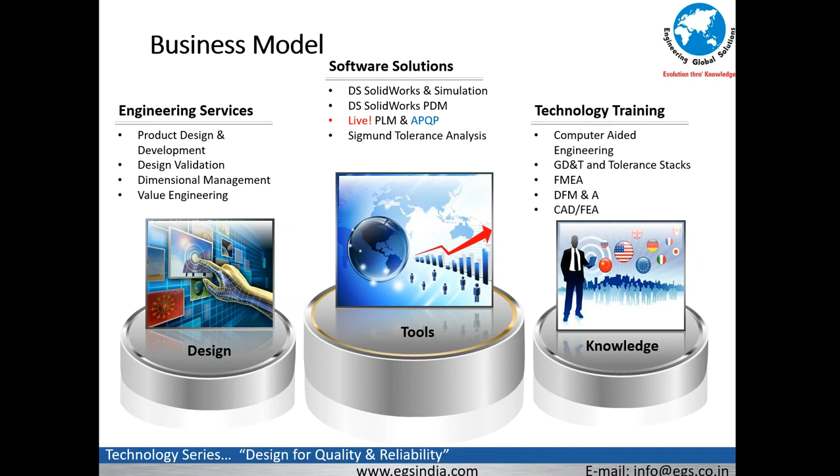In technical training, we provide computer-aided engineering training in finite element analysis, vibrations, and many different topics, geometric dimensioning and tolerancing and tolerance stacks, failure modes and effects analysis, design for manufacture and assembly, and CAD and FEA popular tools.

Now, any product development company starts with product development challenges that every day they face day in and day out. Assembly issues is paramount to most of the companies - 90 to 95% of the problems faced by the customer as well as the end customer and the service people are assembly related issues.

Second comes the product failure issues. Third is higher product cost of product development, increased risks threatening the product success with time delays, and consistency in quality not being able to be achieved.

When you look at the right side image, you will see a Stewart's platform, which is typically used in aerospace applications or space applications, in medical device applications, in so many different areas, wherein the platform takes different orientations and levels according to the actuators at the bottom.

Now, commonly you can see that there are 6 actuators sitting over there. All the 6 actuators are manufactured by the same company using the same drawing, and they are assembled together, and you get assembly issues - the platform not being able to perform the requisite requirements and variations coming into picture.

So in other words, variations in any product as you manufacture leads to quality and reliability issues. At design stage, we always look at nominal dimensions, basic dimensions, ideal dimensions. However, in the real world, it is all driven by variations in the product as a result of how they are manufactured, how they are put together, and how they are used by people in the market space.

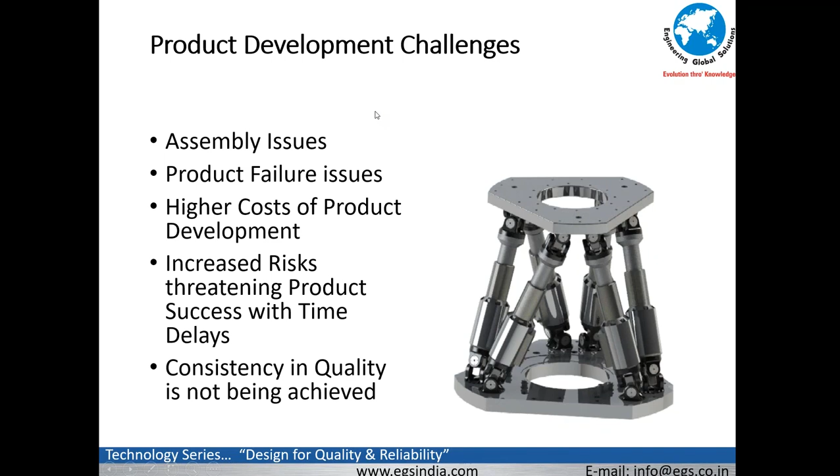Understanding the quality and reliability issues. We need to understand that we need to be consistent in terms of quality of assembly. So if you take any assembly, for example, the assembly shown over there is a switch breaker assembly, a tripper assembly, one of the units coming in that. If this assembly performs inconsistently, the end user gets a shock, which is inadmissible, and the risk is too high for that.

In other words, I develop it for nominal dimensions, but the components are produced at least material condition, at maximum material condition, or anywhere in between. The response time would be different. The faster the response time, the faster the person can save the life. The slower the response time, the probability of a fatal accident is higher. So we need to look at the implications of this, both at MMC as well as LMC or anywhere in between. So consistency in system performance at different variations as permitted in design needs to be understood.

So there is to be a clear understanding of the cause-effect relationship for every quality and reliability issue the designer is conceiving based on the inputs from the manufacturing and the inspection team. Needless to say, the cross-functional team of the designers, the manufacturers, and the inspectors together are the authors of the drawing. Design department is just the publisher.

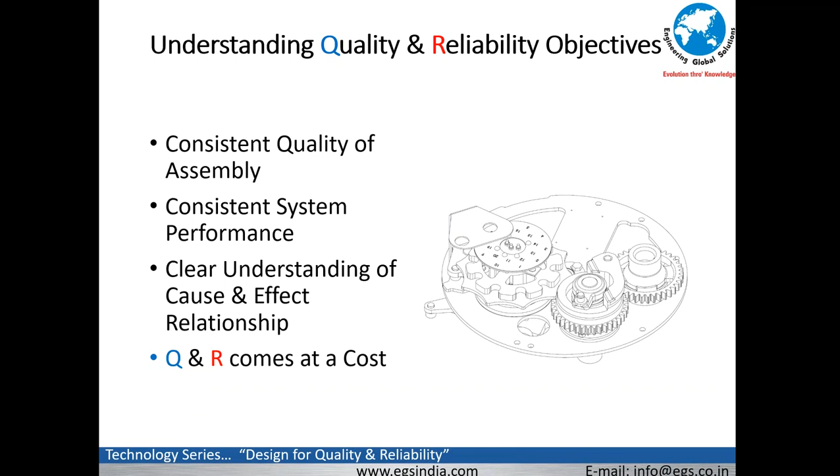So if you classify all the issues that are there currently on your products, you will be able to resolve those issues; they are either assembly related or performance related. So which means the requirement of the Q&R objectives have to be measurable. They have to relate to the voice of the customer, which keeps changing all the time because customers sometimes do not know what they want. Sometimes they do not know which is higher priority. So you have different mechanisms by which you can put this together. The house of quality is one of them. The QFD is one of them.

It needs to be prioritized based on cost because cost is the driver, and driven by warranty issues as stated by the customers. For example, I have a sheet metal cabinet. I'm giving it to the customer. Customer gives a feedback that the fit and finish is not good. That is not a reliability issue, but that's a quality issue. The customer says, when I open the cabinet, it creaks, it makes a sound. Then it's a reliability issue in terms of noise and discomfort.

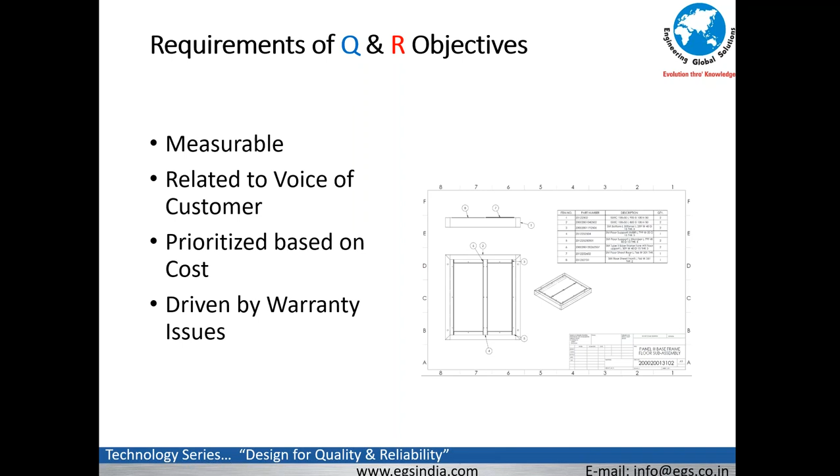The customer comes back and says, after 1 year of usage, the latch does not align because the hinges have worn out. That's a reliability issue. So in other words, the quality and the reliability issues have to be measurable in the specifications so that the designer can take it to the next level of protecting the same. So the quality and the reliability issues find their place in terms of risk assessment in the design failure modes and effects analysis.

Commonly, people look at other people's product designs and come up with new products and technologies. Some people euphemistically call it reverse engineering. It's not really reverse engineering. It's adopting another person's design. When a person adopts somebody else's design, we are inheriting the risks without knowing what they are in terms of quality and reliability. I would rather know exactly what my risks are by designing the components myself than to adopt somebody else's. So in other words, cutting and pasting DFMEA from one product to another is not going to achieve the purpose of enumerating the quality and reliability objectives and at the same time making sure that they are protected sacrosanct.

So the risk priority number will enumerate how high are the risks, how low are the risks in terms of assembly and performance objectives. This is essential, this is critical. So in other words, based on the risk priority number, you could classify it as critical, essential, and desirable. When you mark it as critical, it comes on the drawing as an inspection dimension. Essential, it could be incorporated as a part of the process itself so that it is satisfied. Desirable means it could be an additional attribute to the product that the customer would pay for in the event he chooses or desires to buy it.

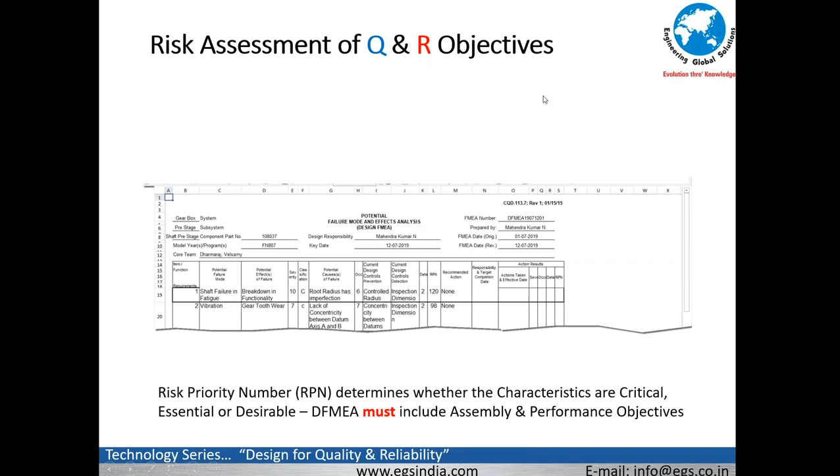So now, coming to the next aspect, we need to be very clear that the design for assembly has to be protected because, as I told you earlier, 9 out of 10 issues come as a result of assembly, or the integrity of the assembly is always challenging. So the first thing we need to understand in design for assembly is we need to look at the sequence of assembly. Unless we know the sequence of assembly, we cannot create the drawings with the associated tolerances.

I repeat, without knowing the sequence of assembly, it's a no-brainer to put a drawing together with their associated tolerances. Alignment with respect to the design for quality and reliability objectives is sacrosanct. It cannot violate. I will give you a simple example.

When the product recall happened, they went around finding what the root cause was. The root cause was they changed the assembly sequence because they were doing a value analysis, value engineering to reduce costs in terms of cycle time.

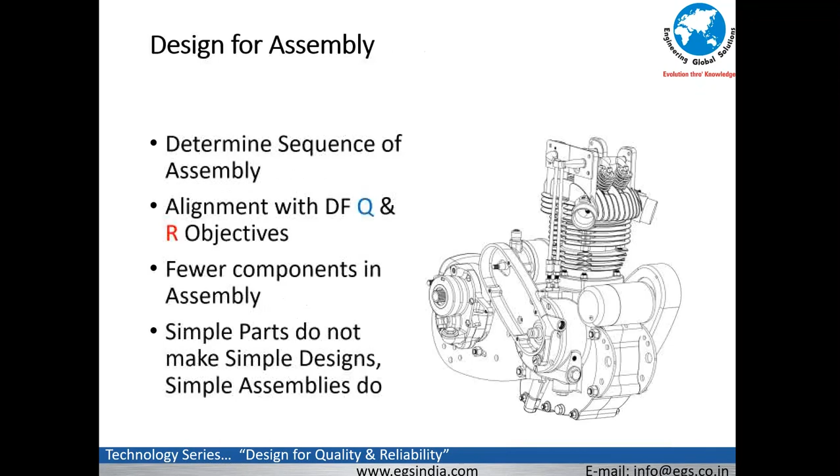Now, how is the part orientation and the location controlled now that we have a few parts which need to be put together as an assembly? Conforming the part definition coordinate system to the assembly coordinate system is what we need to do. In other words, the part's definition coordinate system has to be in alignment with how that part is going to sit in the assembly coordinate system, because that is how parts relate to each other. That is how parts interact with each other.

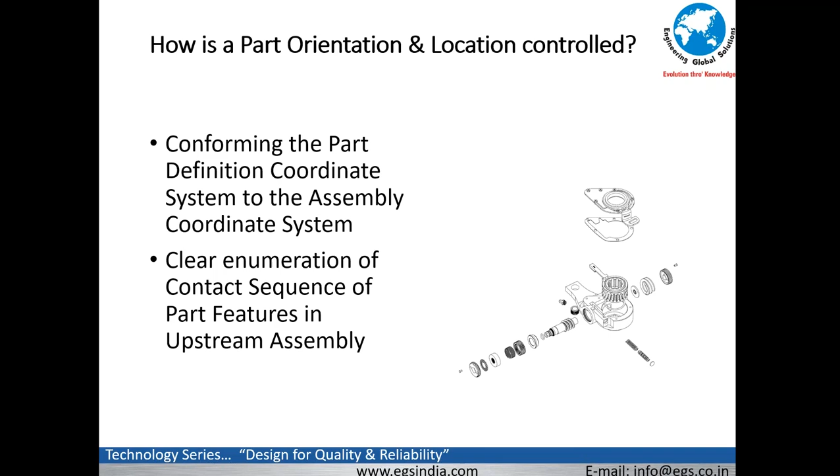The healthier interactions do not have noise in the assembly. When I say noise, I am not talking about the noise that comes as a result of vibration and harshness. I am talking about noise as a result of interactions between parts. The second one is the clear enumeration of the contact sequence of part features in the upstream assembly. When I take a part, and orient and locate it with respect to an upstream part or a sub-assembly, which face touches what, which part face touches next, subsequently, and so on and so forth.

So let us take this example. What is shown here is a swash plate pump. What you are seeing are the housing, the body, the rotor assembly, the bearings, the angular, tapered roller bearings, which contain the axial thrust, and then you have the flange.

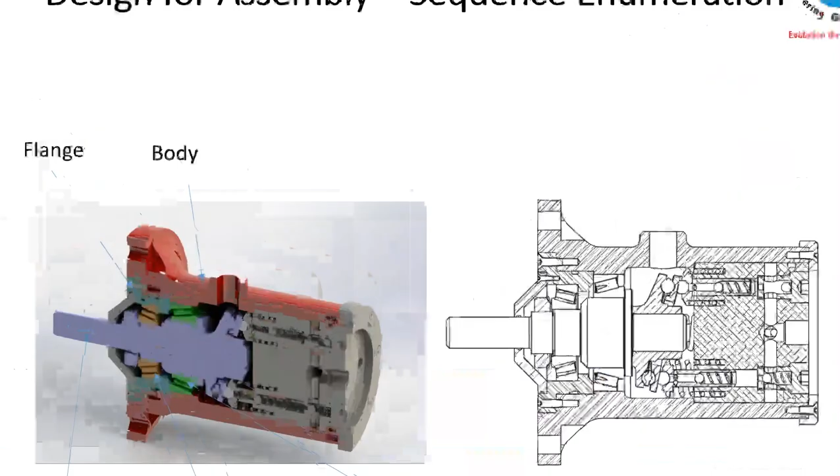So if I zoom in a little bit and you look at the assembly, you will see in the assembly of the body, from the right side, the bearing comes in, the rotor comes in onto the bearing. Another bearing is slipped from the left side, and then the flange cover is put on top. What you see on the right side is an image of the assembly of the swash plate pump.

So when I look at this housing assembly, the sequence of assembly is I insert the bearing on the right side, I put the rotor on the right side, insert the bearing on the left side, close the cover, then bring about the rest of the components on the right side and finish it and then lock it.

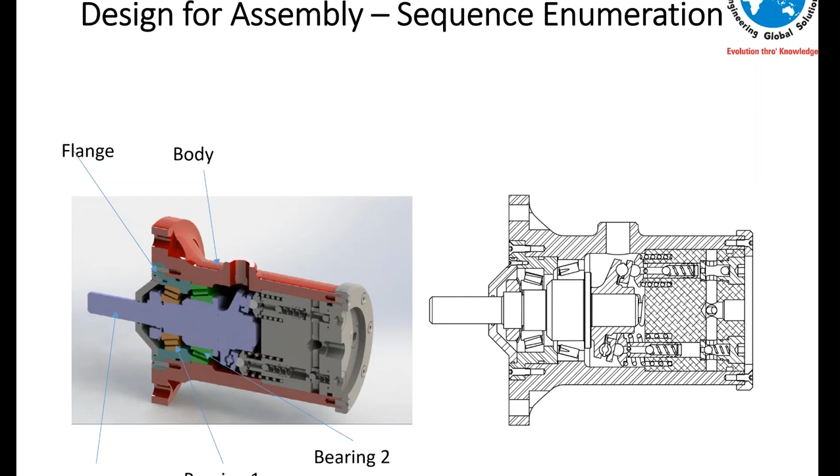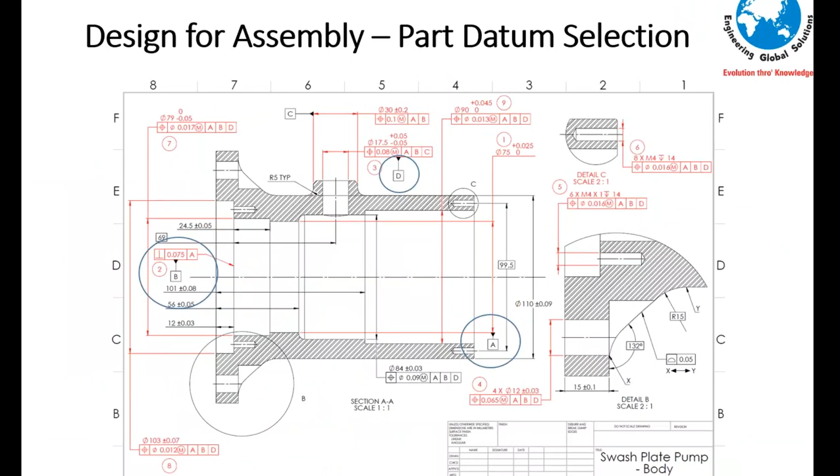When I look at enumerating the drawing for this particular part, you will see the first thing I need to put together is the datums. So what is going to be the datum? What is going to subsequently affect the assembly? It is the tapered roller bearing recess, which is nothing but the bore. So you can see on the right side lower, the circle around the datum A, that becomes my primary datum.

Then comes B, which is the face, because the axial retention of the rotor is going to happen as a result of the flange face. So that becomes datum B. Now you have the axis position restraint, you have the face restraint. However, the rotation about the axis is not restrained. That's where C comes into picture, which is as cast or as molded or whatever it is. Using these three, datum D is referred to, which is the bore for the top vertical hole.

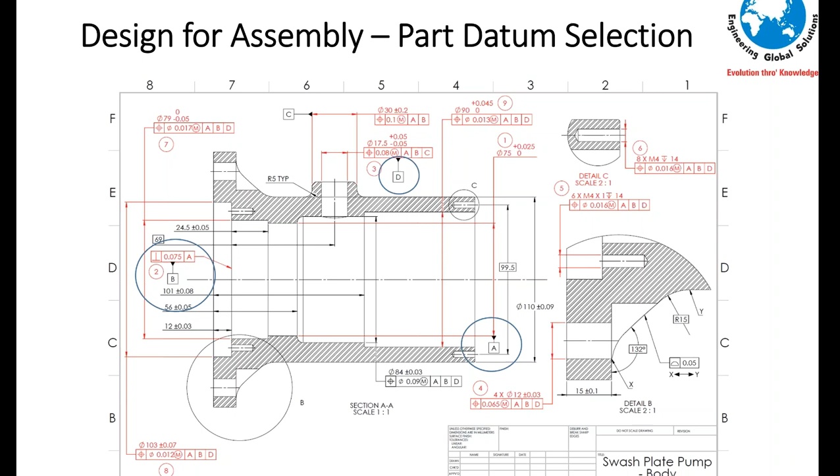When you take these three components together, A, B, and D, that is exactly what is used for referring to all the other features. So in other words, when I put the drawing together, I need to ensure that the datum selections are based on functional assembly. It represents mating features. Stability of the datums is guaranteed. The repeatability is assured because measurements are coming into picture. And then accessibility is guaranteed for inspection. If it cannot be accessed, of what good is it as an inspection dimension?

Just because I have put the feature control frame on the drawing, it does not mean that every one of them is going to be an inspection dimension. Contrary to that, the ones which are critical to quality are ballooned and inspected on the drawing based on the risk priority number. So here, the datum reference frame is formed in the part level based on how this component gets assembled upstream. Since this body is the first component in the assembly, the downstream parts locate with respect to this. Every one of them is related to the other. That's why we have used A, B, D over there.

Datum selection is critical to avoid assembly issues and problems that come as a result of reliability subsequently down the line. Why do I say reliability? With respect to assembly, I take 10 different assemblies, I take 10 different characteristic performance requirements, I get 10 different values. They come within a band. If that band has to be contained, the probability of assembling them together has to be contained.

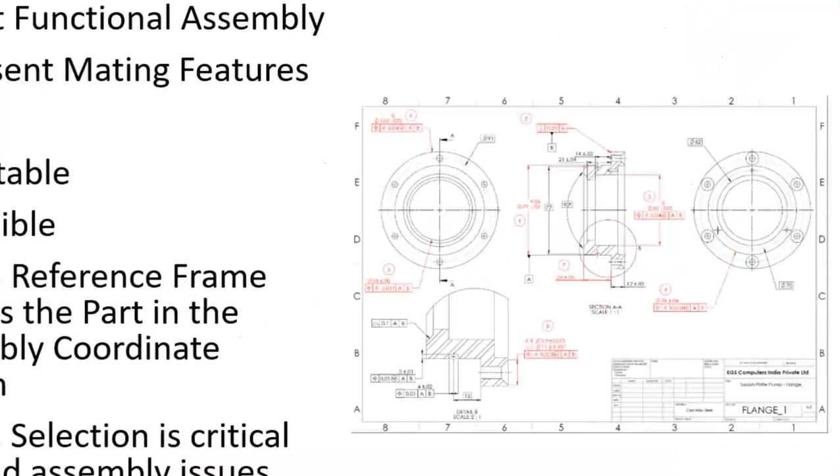So when you look at the right side image, you are looking at the flange drawing. You will see that the bore, the OD of the flange insert, is now the datum A. The face against which it butts against the body becomes datum B. With respect to these two datums, everything else is determined because it's a circular component. So nothing else is required. The pitch circle diameter is given as a basic dimension, not as a plus or minus dimension. This is the intent of putting this together on the drawing.

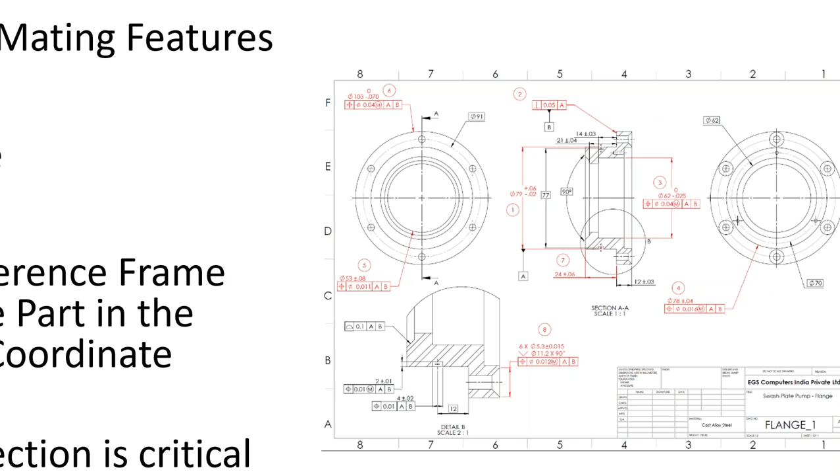Whatever is seen as ballooned in red, they are the inspection dimensions. Now note at the bottom, you have 2 position tolerances and 1 surface profile tolerance, which are not given as red because they don't have a higher risk priority number. So the selection of datum from the DFA comes into picture, and then you have assignment of tolerances. Please understand, assignment of tolerances comes with the knowledge of the process capability.

The next question that comes to the person's mind is, I am not doing mass production design. I am doing unitary production design. Absolutely, but the same machine is being used for so many different operations. What is the process capability, the CP/CPK of that machine for the different operations that you can use it for? That needs to be brought in to see how far away from the centrality you would be, whether it would be a 3 sigma approach or a 6 sigma approach.

So the process capability is required if manufacturing comes back in your cross-functional team and tells you, I cannot manufacture it for these specification limits, increase it. Then you come back and say, please give me your process capability so that I can study it and see its implications in my tolerance stackup analysis. The assignment of tolerance stackup starts with the process capability first, starts with the guidelines first, starts with machinery specifications first, and then gets refined at a subsequent stage by tolerance optimization.

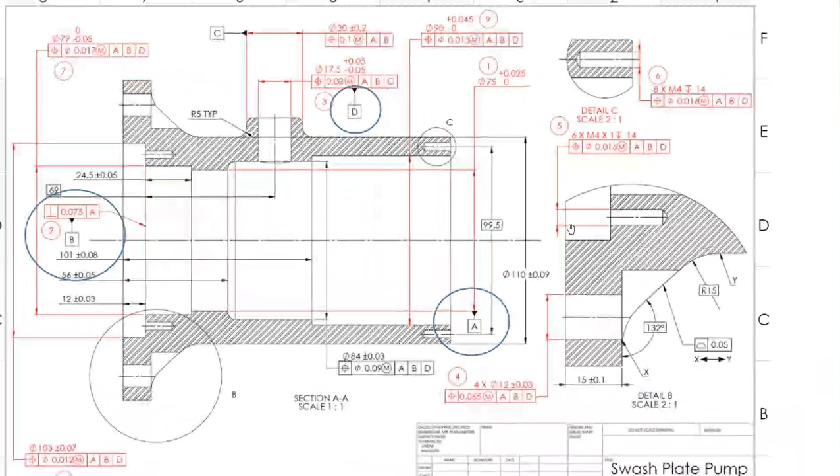The form allowance on the datums is mandatory. For example, if you look at the previous slide, you will see that as soon as I have put the datum A, I have not given the circularity or cylindricity tolerance for the bearing bore area. That's a mistake. However, for B, I have given perpendicularity with respect to A. And for C, I have given location with respect to B and perpendicularity with respect to A for the axis of C.

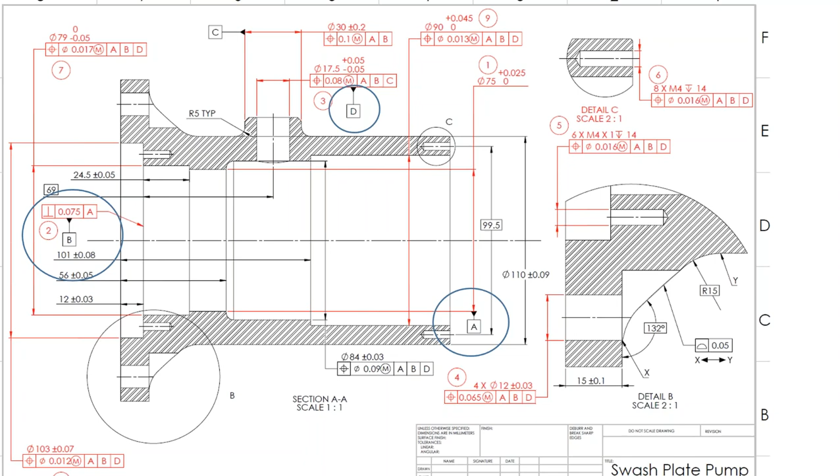Which means the moment I define each and every one of them, I need to understand that form allowance comes from size. It's not separate, contrary to general belief. Form allowance. Allowance means it comes from the size tolerance, typically between 10% and 1/3 max. Now, the moment you say datum B is provided, it is oriented with respect to datum A. So the orientation of B with respect to A, C with respect to B and A is guaranteed by these controls that are established on the drawing. So in other words, whenever we put the drawings together, we have to ensure that the form allowances are specified on the datums. The orientation control between the datums is specified.

Plus or minus tolerances are only confined to the features of size, not for anything else. Angularity tolerance plus or minus is not correct. You can use it for chamfers, but not for angular positioned holes. It's incorrect. You have to use angularity allowance as given by the GD&T tolerances. Why? Because that's how you measure it. So the GD&T for form, orientation, and location control is what typically is given on any drawing based on fit, form, and functional requirements, based on prioritization on the RPN number.

So the bonus tolerance that we provide for producing parts away from the MMC size limits has to be encouraged. For example, in this drawing, you will see the position tolerance is given at 0 for maximum material condition. What does it mean? The hole size is 11 plus or minus 15 microns, which means 10.985 to 11.015. The component can be produced at any one of these limits. When you approach 10.985, you get reduced tolerances with no tolerance at MMC. That's what it means. As you move away from MMC towards LMC, you get a bonus tolerance. How much is it? How far you have moved, that's how much you get.

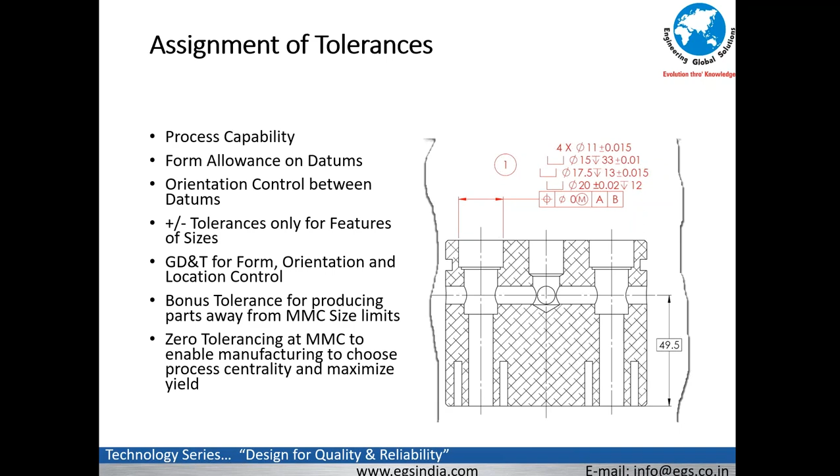Now, if you look at the reliability focus, you will see that, just give me a minute. This image is supposed to move, it's not moving.

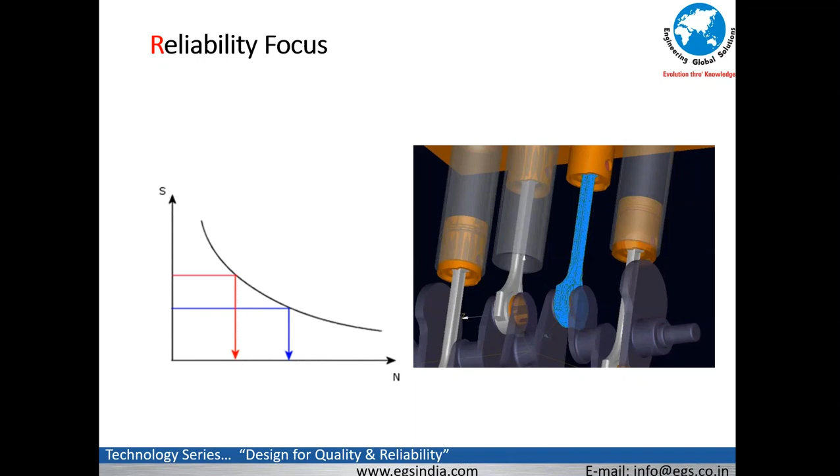The reliability is typically based on the stress versus strain, stress amplitude versus life cycle curve. And you do a finite element analysis, you get back your results and you see where the amplitude of stresses are, you predict a life. But you are doing it for nominal dimensions. You are not bringing in the noise factor called tolerances. However, on the right side, if you look at it, you will see a spread graph for every one of those amplitude ranges. You will see the cycles to failure keep changing. This needs to be factored in. This is exactly how a deterministic approach becomes a probabilistic approach.

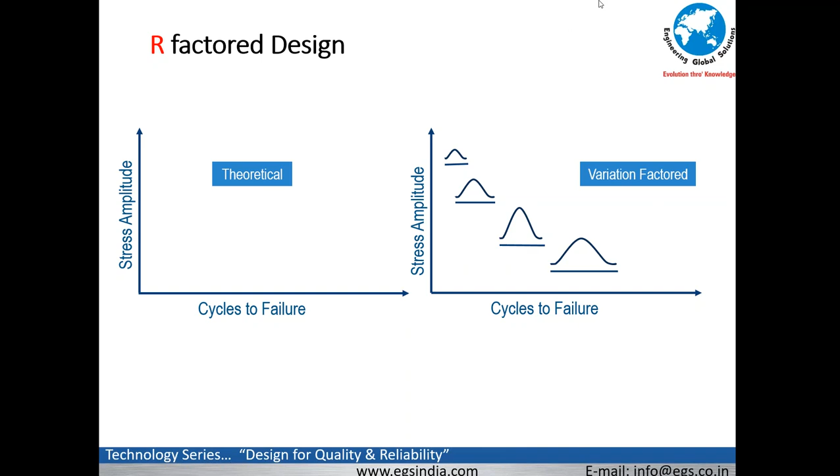When we look at any design we come up with on the reliability side, consider the springs used in the swash plate. If I use a high strength spring steel, I would get 1 million cycles, and the cost of the spring would be 80 rupees. If I use a plain carbon steel, I would get 175,000 cycles, costing 35 rupees.

But what about my warranty? This is exactly where every quality and reliability comes at a cost. This option has to be given to sales and marketing. At every stage, if we can say this is the cost for this reliability, this is the cost for that reliability, the management and sales team has a choice to go to the market and say, for this cost you get this, for this you get that, for this you get our underwriting with regard to warranty.

A survey was done by a camera manufacturer, deviating a bit here. He put up on his website one camera priced at $1,500, and got 1 or 2 sales a month. Then he put up two cameras, one at $1,500 and another at $2,500. He started getting 5 or 6 sales of the $1,500 one, and 1 or 2 of the second.

Then he put a third camera on the list: $4,000, $2,500, and $1,500. Guess what? He started getting more than 10 sales, because the camera is still the same - it's just the bells and whistles we put together. Our marketing has to be empowered with options so that the product positioning given to the customer, in terms of quality and reliability, drives home the point that everything comes at a cost - this is the price, while this is the price. We have seen companies like Rockwell International and Emerson using this strategy all the time to win and capture markets. We need to adopt this.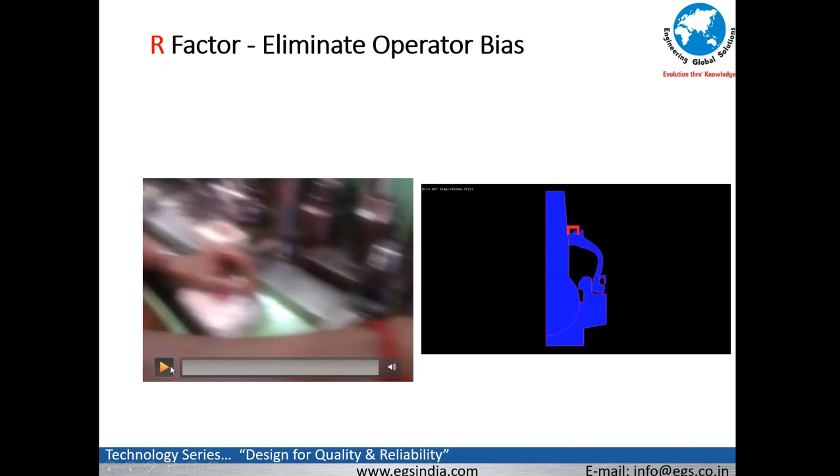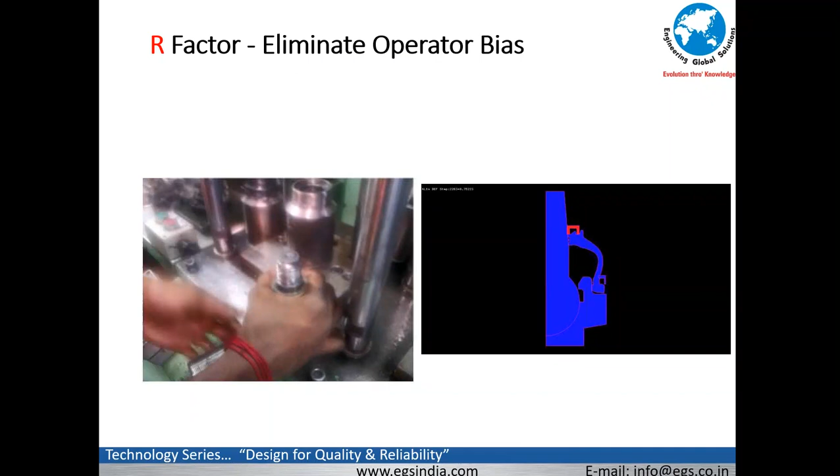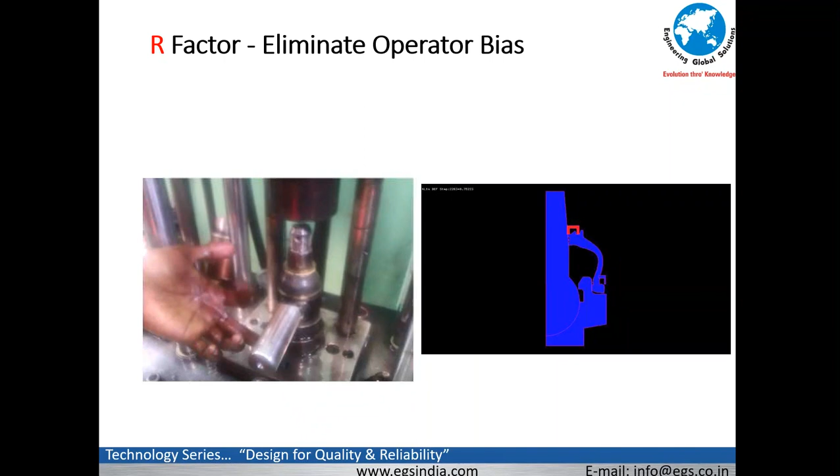Now he takes the component and puts the rubber boot on top of the ball joint. He takes the unit and places it on the fixture. Now remember the left hand and the left middle finger - he is balancing it on his left hand as the plunger comes in to assemble the unit.

So what do we see here? The fixture is inadequate, as a result of which the stability of the part in the fixture is not repeatable. The design has to put a checklist and ensure the fixtures are designed properly to meet the tolerance specifications given in the design. You may say it's a part of tool design, but nevertheless the issue comes to the doors of the design if we have not checked it. So our drawings have to be done in such a way that we eliminate operator bias.

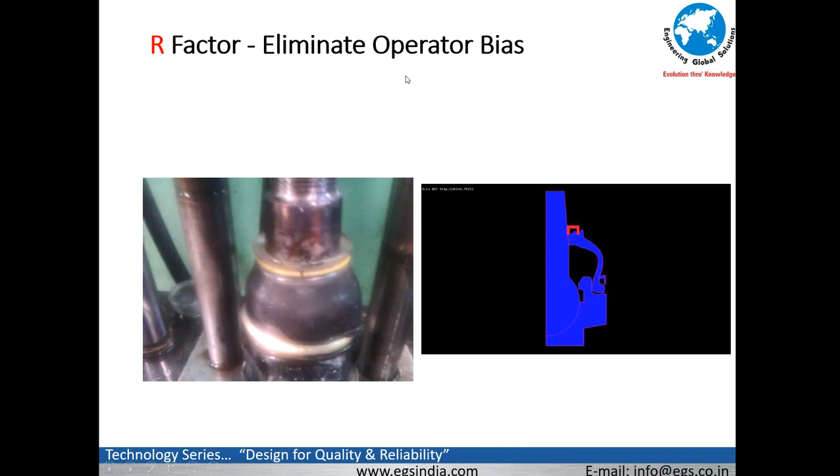So there are three kinds of fixtures that we look at: manufacturing fixture, assembly fixture, inspection fixture. The component that is being produced is a part of that assembly.

We need to do a tolerance stackup to see if the tolerances we have provided can be achieved or not. Sit with the cross-functional team and empower them to achieve those tolerances by changing the design of these components, and also the sequence in which it is put together. So the machine may be capable, but is the fixture capable? In other words, consistent quality comes only when we work as a team in sync, and design looks at the big picture of product quality and reliability at the customer place.

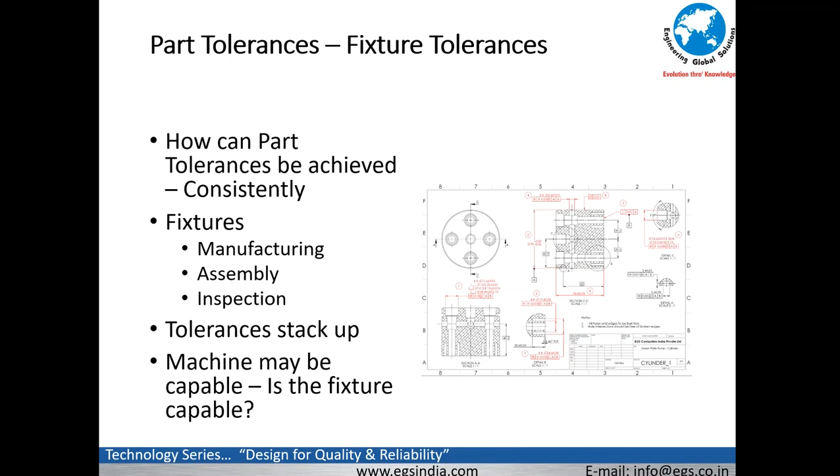The optimality of specifications we give, that is, enumerating the tolerances. We have seen that when we give a tolerance and the customer or the downstream manufacturing manufactures it, one day he comes and says, sir, can you give me a deviation? You say, no, I don't need to give you a deviation. You have already produced it based on the drawing. Why are you asking for a deviation? That is because his process centrality moved out.

If the problem comes in at the customer place, you have given 1,000 components to the customer, 3 components have returned, and your person comes in and says we need to change the drawing. The 997 components which were produced were based on that particular drawing. We need to investigate that instead of asking to change the drawings.

So each assembly objective should have a tolerance stack vector loop, and the critical tolerances are driven by the RPN from the DFMEA. We should have the process capability already known. Capturing the sources of variation is absolutely critical, and each contributor in the vector loop should be assessed for sensitivity for the objective. The optimization of the tolerances should be such that we maximize the tolerance.

If it is at the design stage, even a sequence change in assembly can reduce the tolerance stackup buildup, which can be used for minimizing the overall tolerance amplification in the assembly stage.

Optimization of dimensional tolerances across the vector loops should be weighed using a computer-aided tolerance tool, using the RPN as the weighing factor. Every CTQ should be driven by the risk priority number with demonstrated process capability to achieve it. There are two important things I keep emphasizing in this webinar: the design failure modes and effects analysis with its associated risk priority number, and third, the sequence of assembly and the assembly process enumeration.

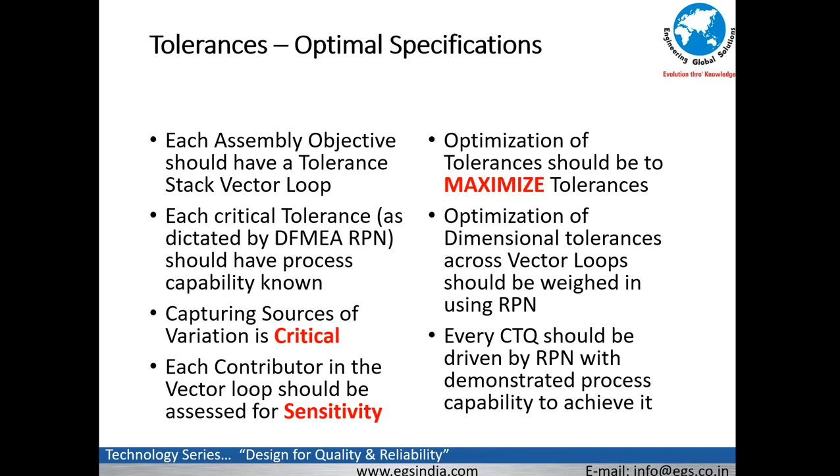Now the fine balance between the cost of precision and the cost of poor quality is what we need to look at. The cost of poor quality comes when the parts are in production. The fine balance means you have released a product, nobody else has that product in the marketplace. Suddenly one person comes in after 6 months, reducing the price by giving an alternate product. Now you have to necessarily reduce your product cost or bring in another innovation. If you don't put in the innovation, your product cost comes down. If you put in innovation, your product cost sustains. So the fine balance between cost of precision and cost of poor quality is driven home as long as the product is in service. The tolerances are alive.

So tightening of the tolerances by design when the failure is reported is not really the solution. CTQs have to come from the RPN, objective selection and not subjective selection.

Another thing is the tolerance variation could happen during function. For example, it could be a result of expansion due to heat transfer, or contraction due to differential temperature gradient. It could be a result of pre-torquing deformation, or deformation changing the stiffness of the component, leading to other performance issues. It could be an air gap variation during operation, typically in an air compressor, leading to eddies affecting performance. So different types of things have to be taken into consideration to carefully calibrate the tolerances.

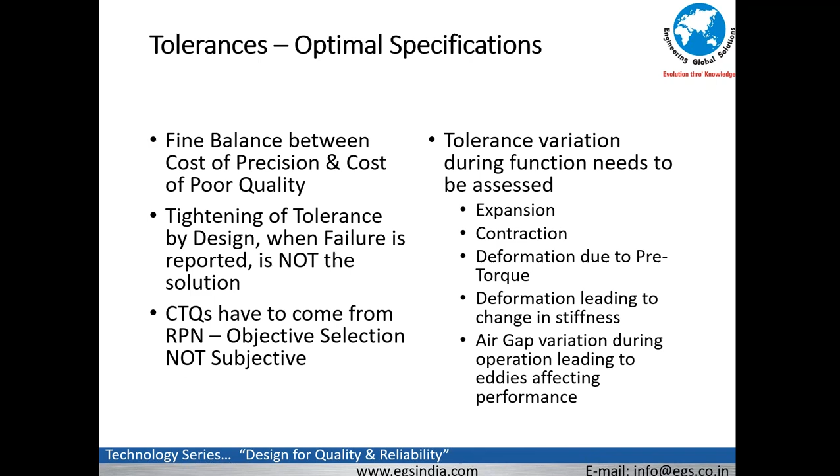There is no silver bullet to it.

So in variation risk management, the choice is given. If you look at the vertical y-axis, it is performance. Horizontal x-axis is tolerances and clearances. The performance becomes higher and higher as the tolerances become tighter and tighter, but look at the fourth quadrant, the manufacturing cost goes up exponentially.

With better marketing, the revenue and cost on the left side, you will see that with superior performance and better manufacturing at higher cost, your profitability is not there, you are at a loss. However, with robust design coming towards optimality of tolerance specifications, and choice of manufacturing according to that strategy, you see that the profitability is assured.

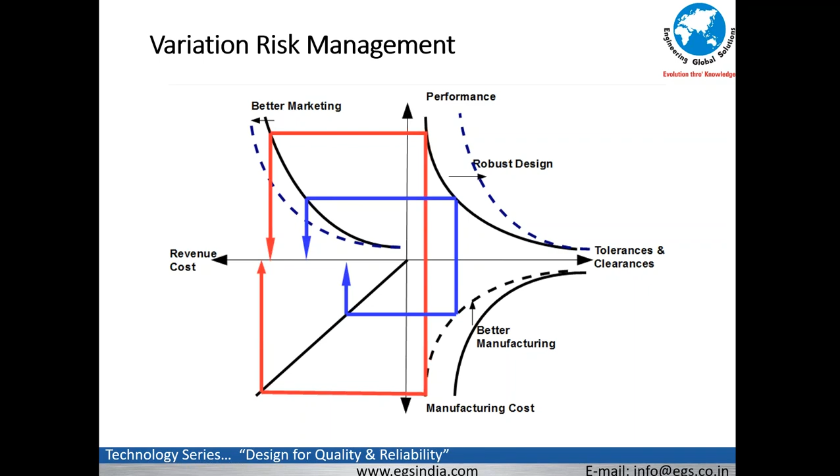So this is exactly where risk management comes into picture. The three graphs are dependent on the data you already have in your organization. In digital transformation, if you put that data in, you will be able to pick up this graph without any issue.

So the effect of part tolerance in the assembly, you can simulate and see it. Look at the assembly yield, look at the Monte Carlo diagram, look at the assembly shift, the histogram shift on the right side, the fourth image that you're seeing.

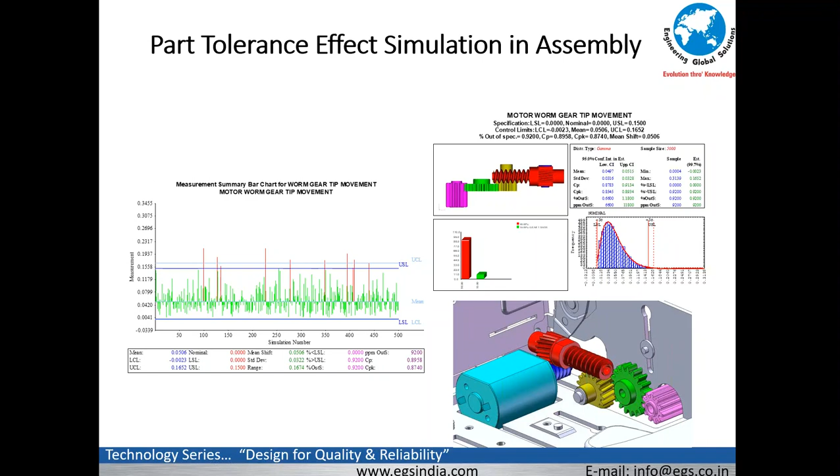So the sensitivity of tolerances in a part, what will affect what, the root cause, connecting the dots, can be done with this kind of sensitivity approach. In any assembly, whether it's sheet metal, gearboxes, or combinations, anything you want, you can get it.

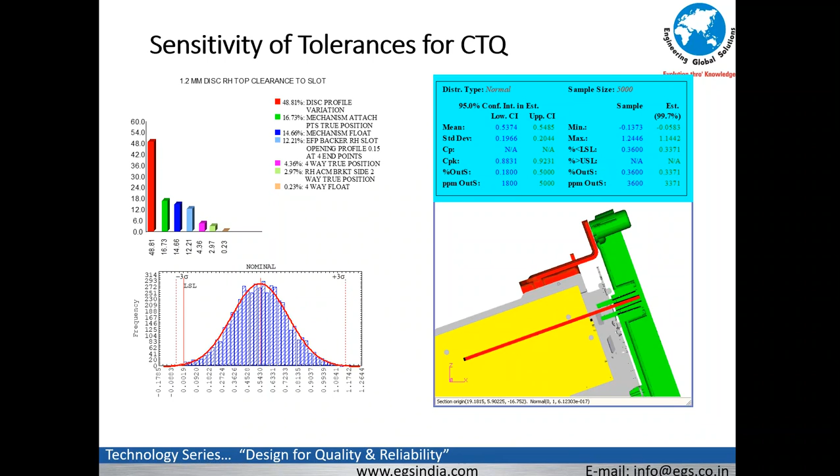So we have looked at the essences. We need to connect all the dots together. That's exactly where the DFQ&R process comes into picture. The design for cost, quality and reliability objectives, measurable objectives are taken and split into assembly objectives and performance objectives. The DFMEA gives you the risk priority number.

The design for assembly comes from your assembly objective, and the design for life comes from your performance objective. From the design for assembly, you get your datum reference frames. From that, you put your tolerances, do your tolerance analysis, bring in cost of precision and cost of poor quality, put in your design failure, design for manufacture CP, CPK, and the risk priority number, and do your optimization, putting that as critical to quality based on the RPN number as the KCs on the drawing. Then release the drawing after taking into consideration design for cost, design for service, design for transportation, and design for performance requirements as well.

So this DFQ&R process, at the end of the day, enables you to develop product design specification drawings based on quality and reliability, through the prism through which you see, and enable this downstream. So this is a dynamic event.

So the CP/CPK keeps on changing, the COPQ keeps on changing, the service requirements keep on changing, the quality and reliability objectives keep on changing. So everything is dynamic according to the business process and challenges you face in the marketplace.

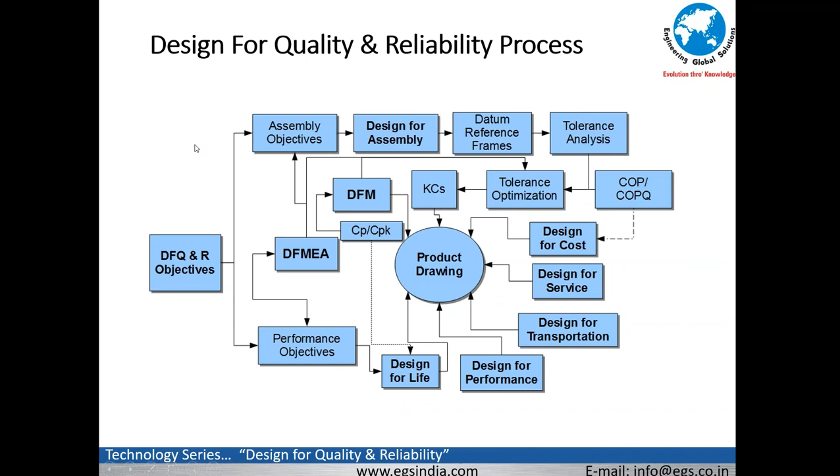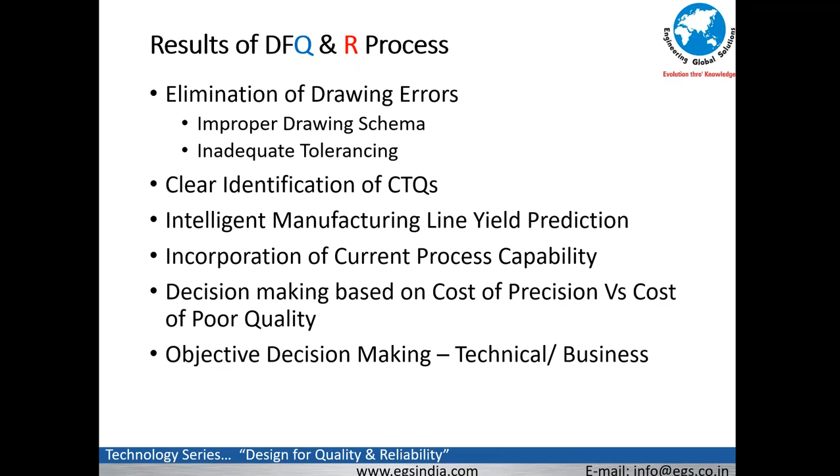So the results of the DFQ&R process are: it eliminates drawing errors caused by improper drawing schema and inadequate tolerancing. It clearly identifies the CTQs, the critical to quality, upfront. Intelligent manufacturing line yield prediction is possible. There's incorporation of current process capability—current meaning it is live—and decision making based on cost of precision versus cost of poor quality, and objective decision making based on technical and business goals.

Continued, if the processes are right, you get it first time right. If you don't get it first time right, you end up going through this process anyway, either as a result of manufacturing line feedback, quality line feedback, or customer feedback, and you need to go back again anyway. The choice is ours.

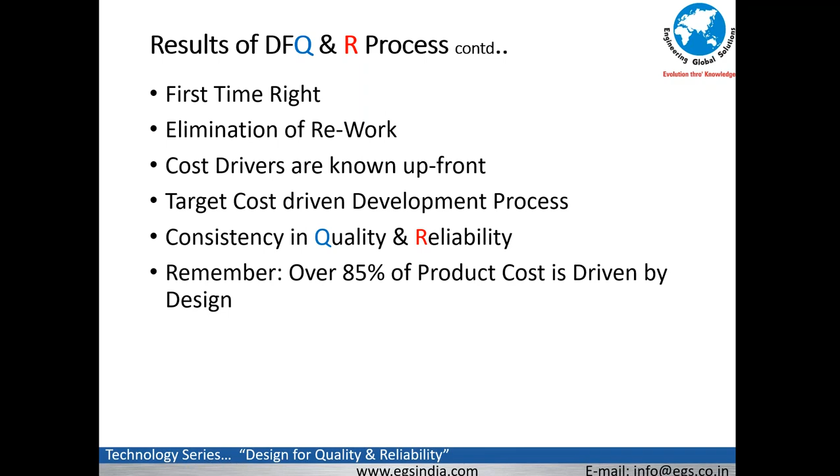It eliminates rework if we do it upfront right. Cost drivers are known upfront, in a target cost driven development process. Consistency in quality and reliability is assured. Remember, over 85% of the product cost is driven by design. If we choose this approach, the overall product cost comes down. The product development time for the drawing is going to be higher, but the overall product development cycle time comes down.